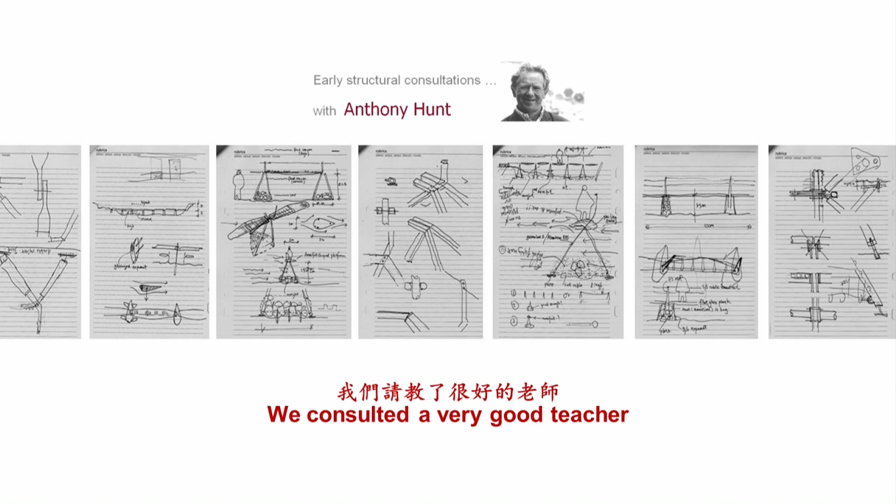So I went back to him and said, no, we don't have that much money. He said, how much do we have? I said, well, $2.50, that's all we have. And that includes your fee. So he said, okay, right. We start the whole thinking process.

This is how the villagers build their bamboo version of it, and every year the water comes and then it will be destroyed. I said, why don't we just use that as a basic principle, knowing how they do it, and then just do it slightly better in such a way that 95% of the time the bridge will be crossable, but only 5% of the time the water will come. The plank will then be dislodged and sink to the water next to it. And after the water is gone, you pick it up and put it back.

In doing so, you don't need a big foundation. You don't need concrete. You just need a bit of stone and some steel wire. And that's how the bridge should be done. So we looked at it, it's a very sustainable and appropriate way to design something that works. And that started the whole process of us using natural material to help the villagers.

But the design of it is quite difficult in terms of engineering calculation. For example, if we were to use a normal way of designing that plank, it would be about 300 mm thick and weigh 1 ton, so nobody would be able to carry it and put it back. So Tony designed it in such a way that it's only 150. It's very clever. So we designed the whole thing so that everybody can work on it manually.

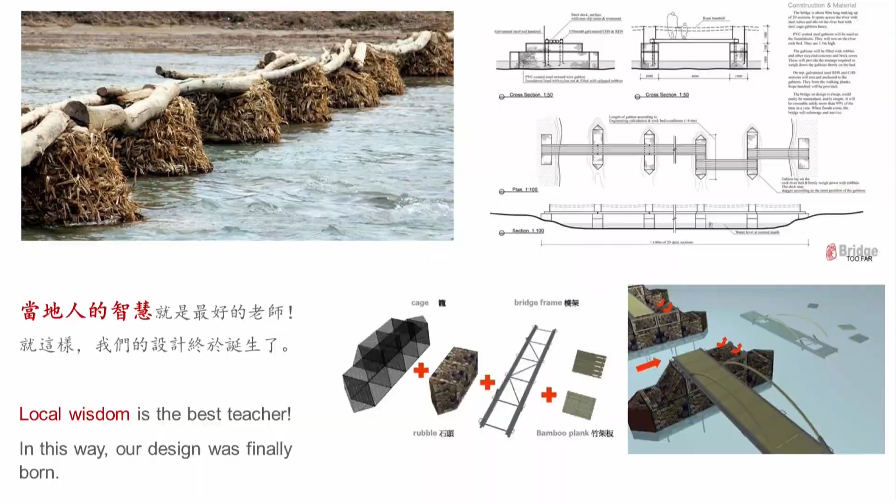Okay, no problem. But he said you have to be responsible for your transport cost. We can donate all the cages to you, and good luck. Then we were worried, and he said, hey, come on, you know Italians, how they behave. He said, hey, come on. All our cages are now made in China, don't worry, we ship it back to Italy.

Okay, so we went back to China and found the factory where the company actually makes the gabions nowadays. They're all made in China now. So we shipped it from his factory near Shanghai instead of from Italy. So that was how Made in China is now well known. Okay, so these are the cages. They are guaranteed to last 50 years, i.e. after I'm gone, the bridge will still be there.

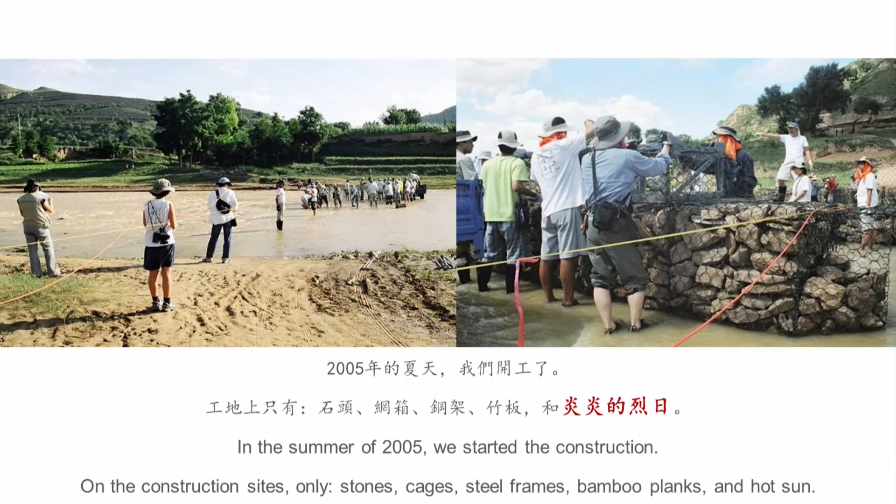And then the students are very nice, and they try to help us moving the rocks, and we try to help ourselves by moving the plank onto the pier. By the way, we did a statistical analysis of how the students help us. We finally realized that the bigger students carry the smaller rocks, and the smaller students pick a big rock. So you see, the size of the rock is inversely proportional to your IQ.

So that was the final plank, and how the whole thing works together. That's the end of the 5 days of work. It took us 5 days to build this particular simple bridge. As you can see, it's very similar to their bridge, but it can be crossed without problem 95% of the time. And this is how we test the bridge: by putting everybody up there and taking a photograph. If they survive, then the bridge is safe.

Luckily, we entered the competition, the RIBA, and we won. That year, Norman did not win anything because his bridge was still wobbling. So he got an award later or something like that. But he asked me to go to his office to give a lecture. And he looked at me like that and said, why can your $2.50 bridge rival my 20 million bridge? And it doesn't wobble.

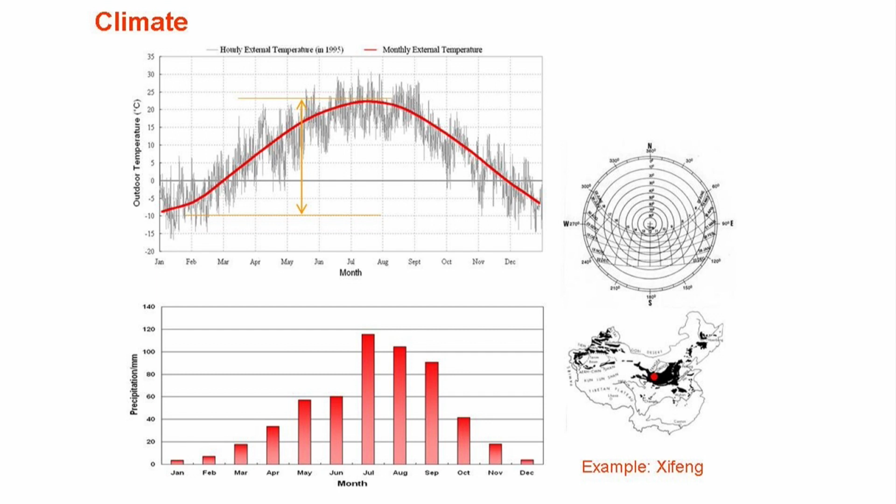Thermal mass, because of the high temperature swing, you only need to use a lot of mass to stabilize the temperature. Once you stabilize, then 40 degrees and 10 degrees become 25 degrees. Your interior will be at 25 degrees, okay? So that is how we should find a way to look at this kind of weather chart and say, yeah, these are a few things that you must do. Of course, there are other things like daylighting and fresh air that you need to incorporate into your design, but that comes a little bit later.

So we then measured some of the buildings that they have, and we found out that actually the traditional buildings, the caves, are more stable, whereas the school that they built using brick is not very stable. So if a school is built like that at the bottom, then you won't be too comfortable in the winter and in the summer. But on the other hand, if you built it with earth, like a cave,

it is better. But on the other hand, the cave can only be very small in terms of volume. Then you don't have daylight and you don't have fresh air. So you have to solve some of the problems by combining the traditional wisdom and the modern scientific know-how. Then you can find a way to design schools better.

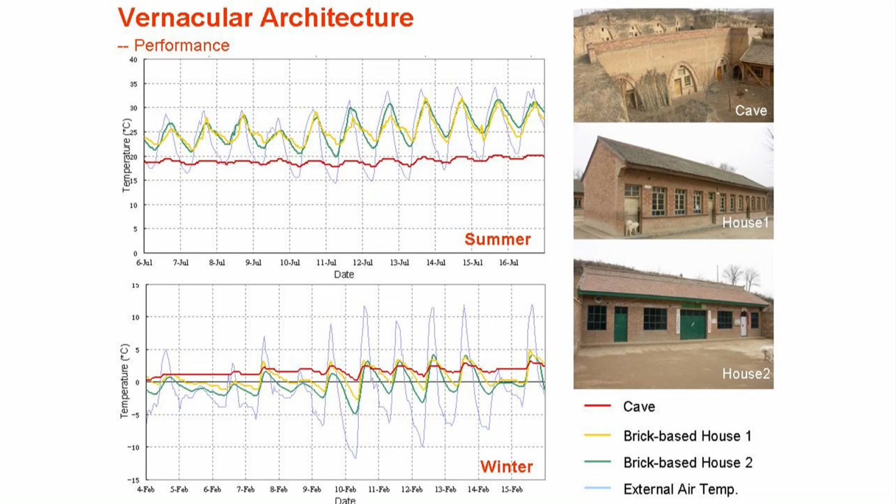Okay, and then the other thing is, as I have learned from my teacher, if you want your building to be cheap, then the locals have to know how to do it. Otherwise, you employ somebody else from outside to build it, and it would be very expensive. So we know exactly how the locals build the buildings using earth and their tools and things like that. So we learn from them.

This is actually part of a PhD thesis of one of my students, trying to see what kind of techniques one might use for this kind of situation, from very simple wall elements to more complicated incorporated systems. So every time you do something, you improve the performance. You just need to do some analysis, calculation and simulation to make sure that you know exactly what you're doing. But there are many different methods. So which one to use depends on how much money you have.

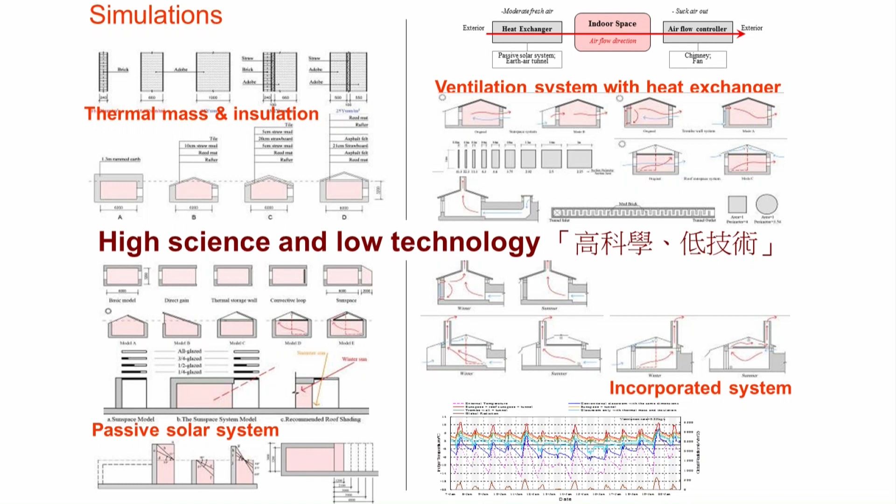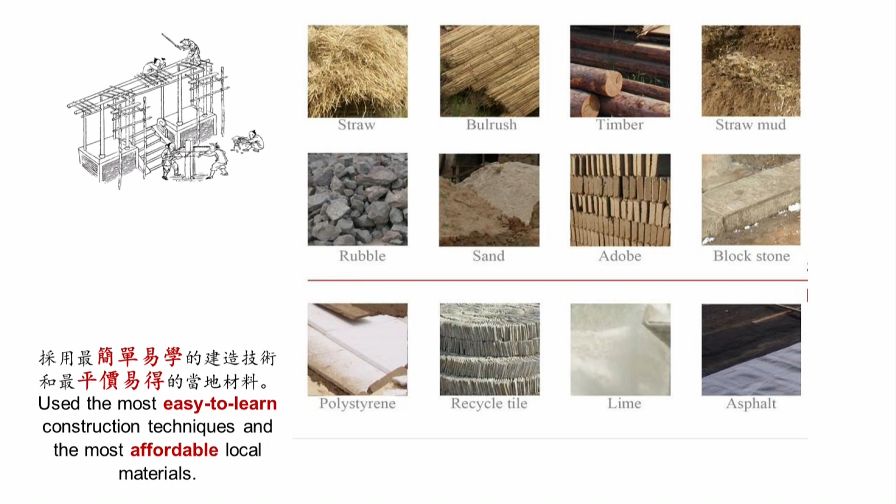Natural material, as I told you, is very cheap because they just gather it from the field and then you just mold it a little bit. But sometimes you have to use modern material to help you, like a bit of polystyrene and things like that. So you have to combine some of the modern material with the traditional material. But the traditional material is about 90% of all the materials. So the embodied energy is very, very low.

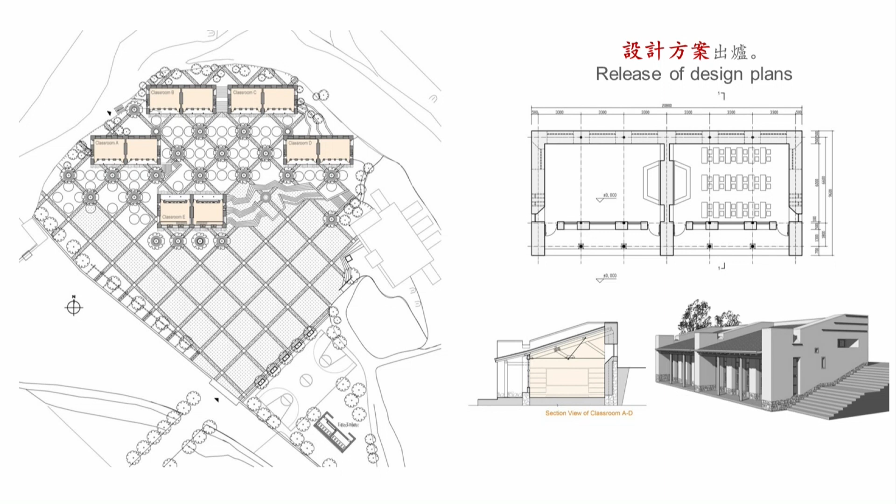This is the kind of design that we make. Very simple, modular, so that we can replicate it. But on the other hand, we have to arrange the modules so that they form different kinds of outdoor spaces for the winter and for the summer, for the children. The level changes according to the topography. So it's a very simple kind of building that we have designed for them.

And then we asked the villagers to build it themselves. Their workmanship level is very low, so your design has to be very rough, very tolerant of low workmanship. But as you can see, it's mostly built with natural materials, low embodied energy, but very effective.

And we did the calculations and we did the measurements to compare with the calculation. We found that actually in the summer, the indoor air temperature is about 23 degrees constant. So it's very comfortable. And then in the winter, when the outside is minus 15, the inside is still about 5 degrees. So you just need another jacket or something.

And the volume is calculated in such a way that every lesson is about 40 minutes. And after every lesson, they all go out. So they open the door, the fresh air comes in, they fill the room. And then they come back in, the children will warm the school for you. Each student is half a kilowatt, you know that, yeah? Okay, so you see, your students are good. Yeah, half a kilowatt.

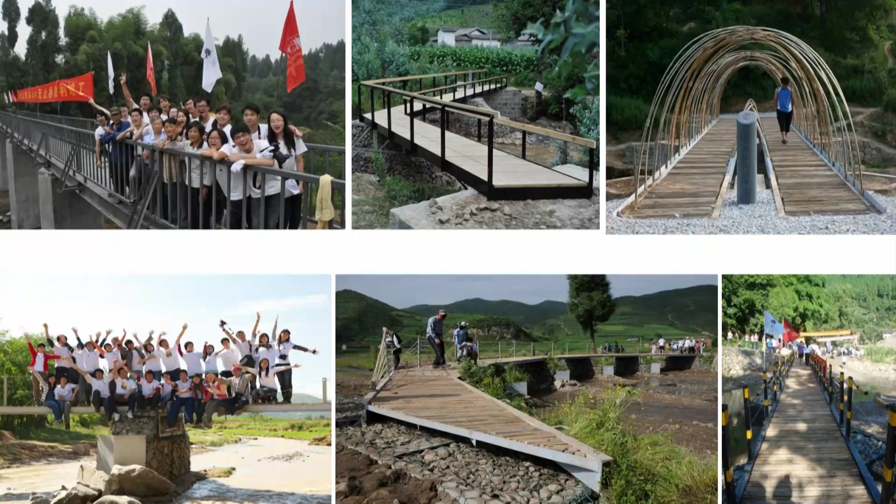These are some of the examples. They're all designed by the students. The only criteria is that they have to be very cheap. So if the student designs something very expensive, they have to ask their mom, not my mom.

And then we have one honorary patron, Sir David, and he told me that actually it's not the bridge that matters, it's the people who build the bridge that will be forever. It's very true, because the bridge comes and goes, but the people's idea will stay if you train the people well. And I told a lot of people that I only need to train 2 students, and if they can train 2 more, then in no time at all, everything will be done. So this is how small efforts can sustain.

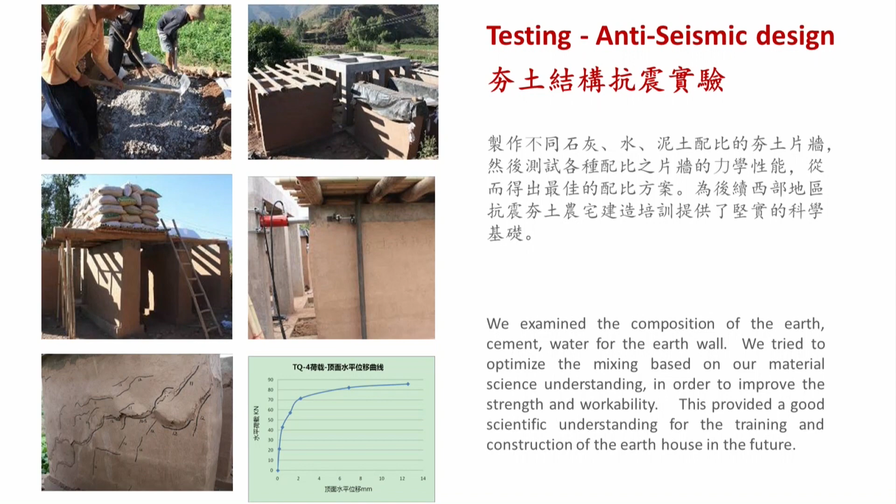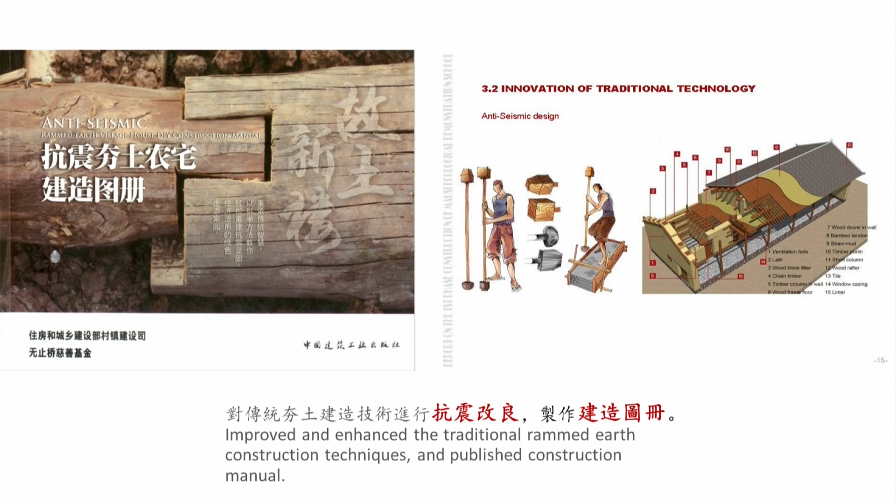And then we also designed the building in such a way that they interlock to each other. So all the elements are locking to each other. The timber, the rocks, and the mud all kind of come together. And then we improve their tools and the way that they work. And then we publish a booklet to teach them how to do it. But that's not the end of it.

Each house is not a standard house. For each family, the students went to do a survey, and if they have more people and they want their toilet to be on one side and things like that, each house is different. So it's their house, it's not the house that we designed for them. So they recognize their house. Some of them want their cows to be underneath, some of them want their pigs to be on the one side.

So when you design for people, we understand that to be sustainable, you have to design for them, the space they want, not the space you want, or not the space that's the easiest. But then, on the other hand, we had to find a way to modularize it. So you can see that they're actually very modular. They just shift around a little bit, get bigger, get smaller. But they're all one kind of structural system, but many different kinds of spatial interpretation.

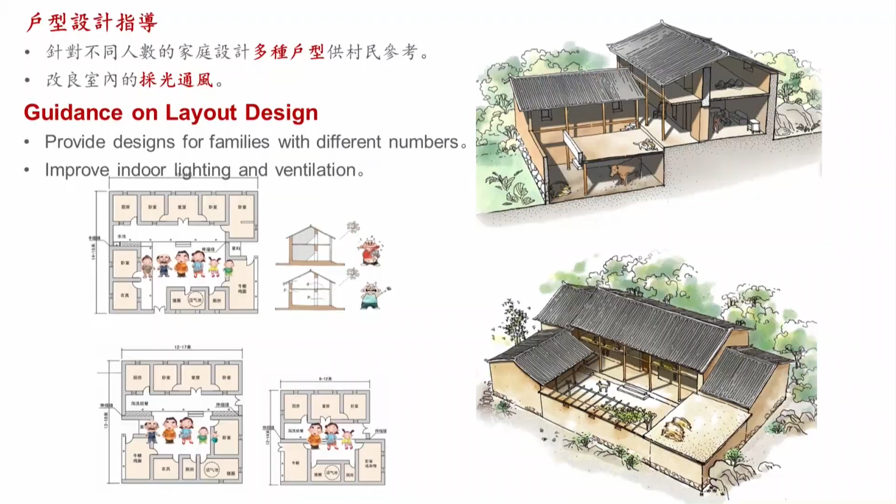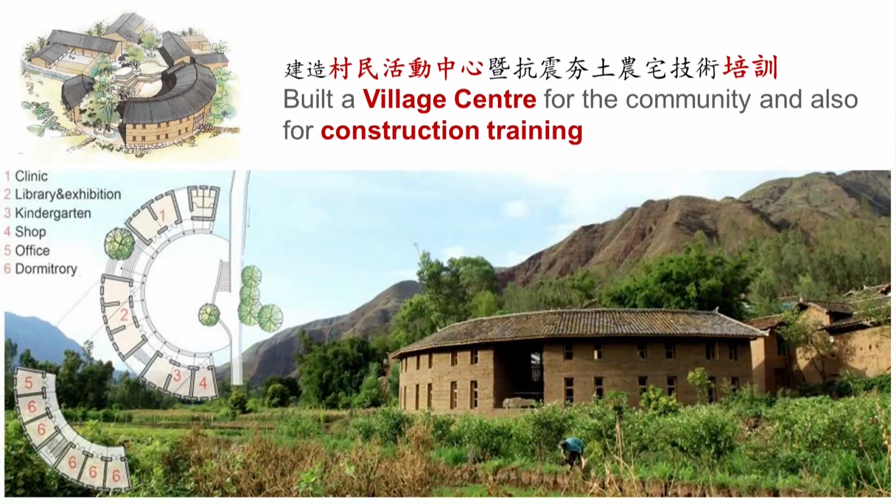So we try to kind of melt into the community by designing and building a little structure for them. And we also went into the village to do a few things, the water supply and eco toilet and things like that. And this became the World Health Organization's first health village in China. Because the World Health Organization has certain things you must do to qualify. So it became an example, so surrounding people can then learn how to do it properly.

We also, of course, do performance evaluation. The outdoor-indoor temperature goes without saying. But the cost is much lower than if you were to employ somebody to build a concrete framed house for you. It's only about 200 instead of 1,000, so 1/5 of the price. And of course, the satisfaction is high because it's their house, not our house.

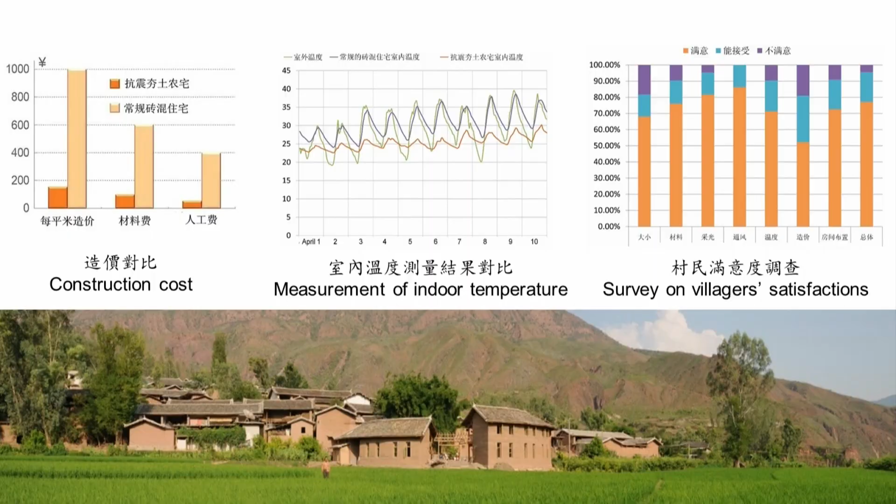And I like this particular photo very much because after the reconstruction, they restart their life, and this is how they plan their next year's crop, in front of their new village, so-called.

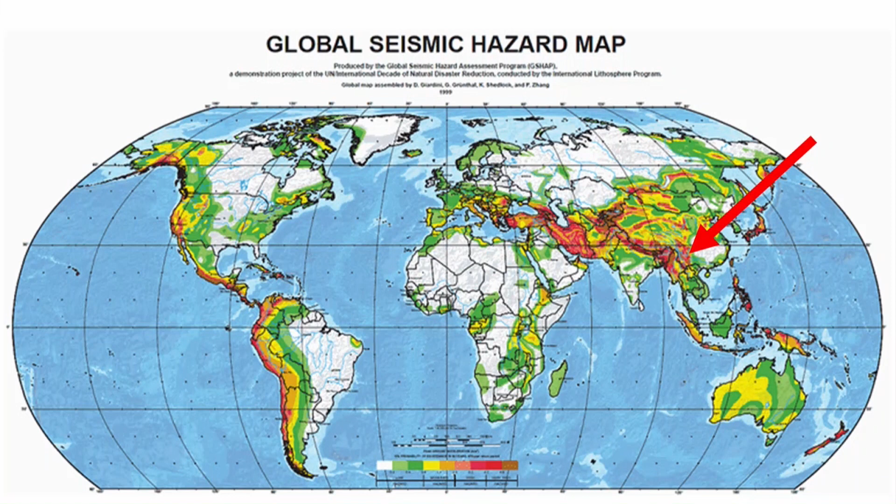But then lots of people ask, once they have money, will they forget about earth houses and go for this kind of Spanish villa and things like that? They may, but then can we do something? So we start our investigation in one of the villages where the arrow is, and you can see this is the seismic hazard map of the world. The red areas are seismic zones, and many millions of people live in those areas. But we work in that spot there.

This was another earthquake that we were called to respond to. And this is the situation after the earthquake.

And this is the old lady again.

I like helping old ladies and old people. So if you get old, don't worry, I will come to help you. But then I will be up there somewhere. I'll help you spiritually, okay?

Thank you. So after the earthquake, what do they want? They don't just want a house. They want a new life. They need a life that is better than what it used to be. They have to stand up again and live life. And that is the more important thing than to build them a house.

A lot of the time we go in, NGO, we build them a house that they don't want. They look horrible. And then they say, you are one of those people, okay, so I give you a small house. No, you don't do that. You have to give them what we call the dignity. They must be very proud of their new life. So that was the motivation behind our architectural intervention.

So we set up a few principles. Okay, we must reuse the material, it must be safe, and we must teach them how to do it properly. And more importantly, we must add to their life somehow. So we team up with a few people, one professor in Cambridge, she's a seismic resistant kind of expert, and then other people to design something that will stand up in the next earthquake. And then we have already learned how to use local material, local workers and techniques.

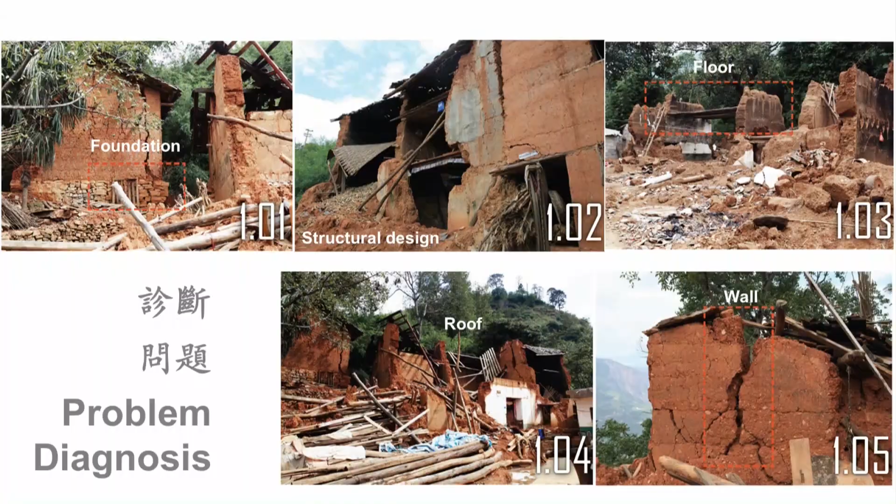This is the lady. I've talked to them. And the first thing you have to do is to see where the problem lies in their earth houses. So we dissect the problem. And then we come back to the laboratory to see how we can improve the material by mixing different kinds of material, different kinds of soil together to perform in such a way that it becomes almost like concrete.

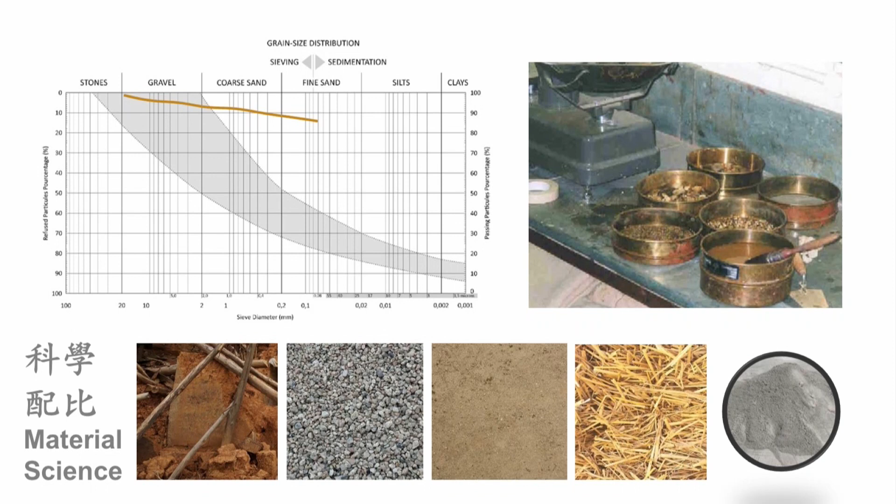So you have to find a way to make sure that that yellow line is within the gray bar. Then you should be okay. Otherwise you have to remix the soil, you have to add something to it, you have to take away something to make sure that it behaves. So this can be done scientifically using the material science understanding. That's easy, but you have to do it.

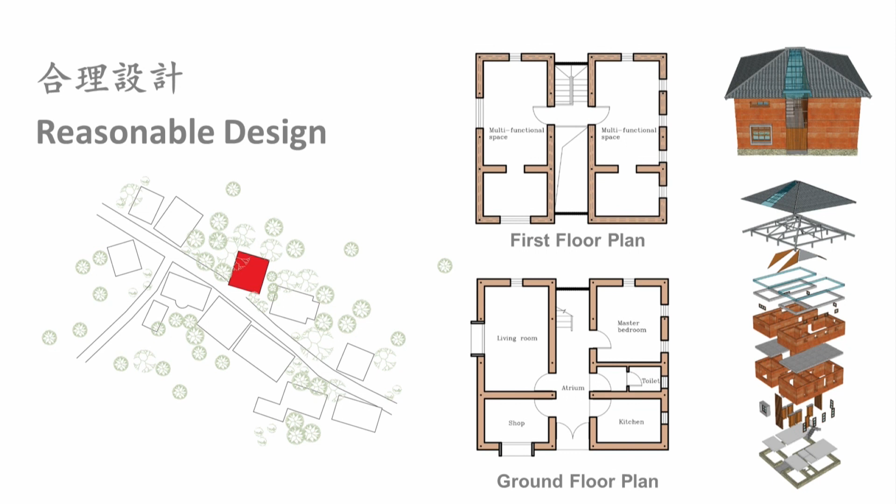If you do this in your studio, you probably get a C- or D+. You know, students, when they do design, the first thing is, oh, nice, looks nice. You get a B+. This is C-. Never mind about the C-, okay? Let's start with C- and see how it goes.

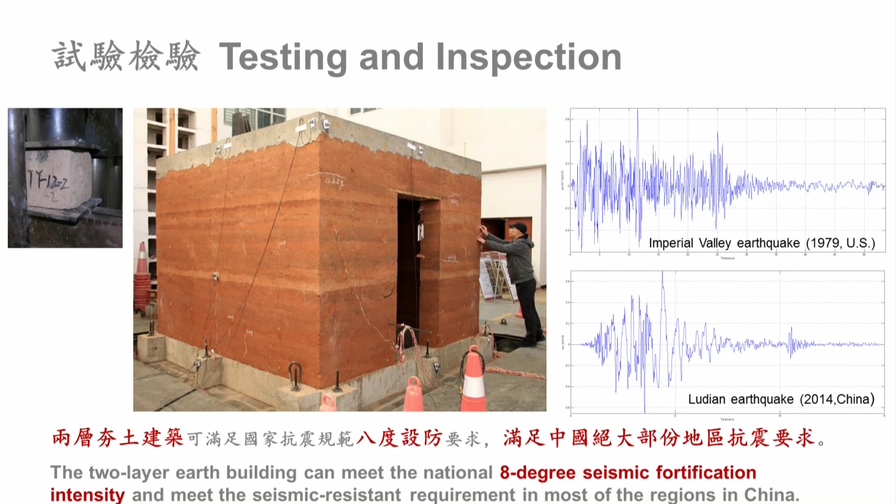And then we test it so that what we are trying to do is safe. So the 2 diagrams are different kinds of seismic wave patterns. So we have to test different patterns of earthquake to make sure that when earthquakes come in different ways, they will survive. And we test a number of them, and it survives. And it also satisfies the China 8th degree requirement. So this satisfies the national standard. First time that an earth building can satisfy the national standard. Before that, it could not happen.

And then, of course, we also do the cost performance analysis that you have seen by using our understanding of the psychrometric chart. You all know the psychrometric chart, yeah? Good, thank you. This is again the cold weather, you can see, and dry.

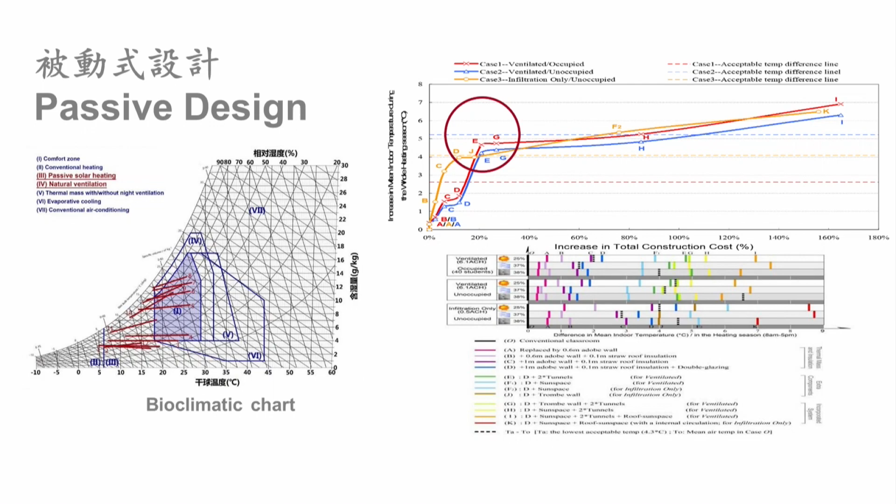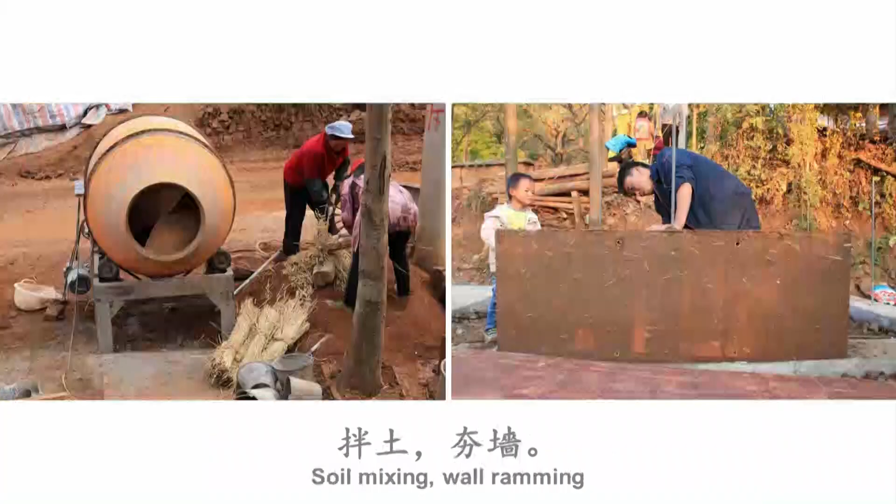Okay, we have to teach the workers how to mix the material, how to pound the wall, because how you pound the wall matters a lot. You have to compress it to a certain extent that it becomes almost like concrete. And everybody has to know how to do it. We add some straw.

And we improve their formwork, because if you have to pound it very hard, then the traditional timber formwork doesn't work anymore. So we have to use steel formwork. So we introduce a modular formwork for them to work on. So the quality is much higher, therefore.

And we taught them how to do it, and this is the owner of that particular house. It's the son of that lady. And now he's our contractor, so he's now making a living by building these kind of houses for others. So we're introducing skills to them.

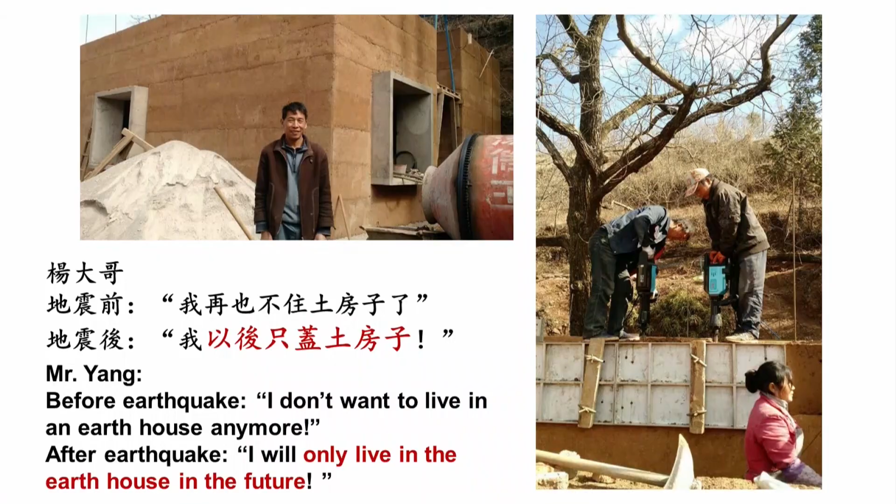And as you can see, we introduce also new tools, now an electric pounder, so the soil can be pounded very, very compactly. And this is how it works. And this is the end product, the square house, as you can see. Very simple. This is the old man. And

this is the in-between space that the old lady now enjoys. Because we talked to the old lady, she does needlework, and she has been doing needlework her whole life. So okay, if you want the old lady to do needlework, what kind of environment do you need? You need somewhere that is cool enough or warm enough, and also bright enough. Okay, so this is how the space works.

And in this space the temperature is so constant that she has air conditioning all year round. In the winter it's warm, in the summer it's cool. And because the two sides are perforated, the wind can blow through, a little bit of air movement, very bright. And some of the leaves fall onto the roof, the skylight kind of. When the sun shines onto it, it kind of dances a little bit.

Nowadays, she not only uses this space for needlework, because so many villagers like this space when the outside temperature is so high. So she charges people to come to her home to drink tea now, which is very good. Okay, so she's very proud. And now she has a house that can earn money.

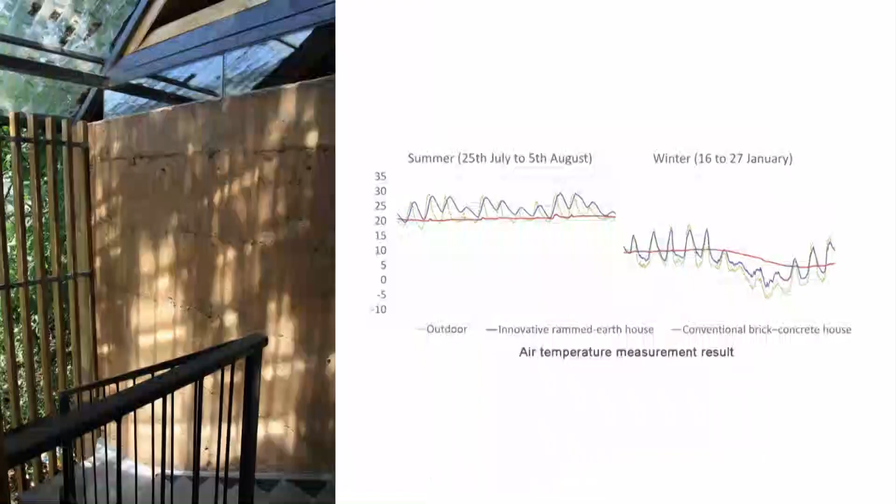And we did the measurement. I mean, you all do measurement after your design, I hope, and it works very well. The cost is only half of the normal cost using concrete and brick and other things. So it's very cheap. The performance is good. It's very strong, and everything.

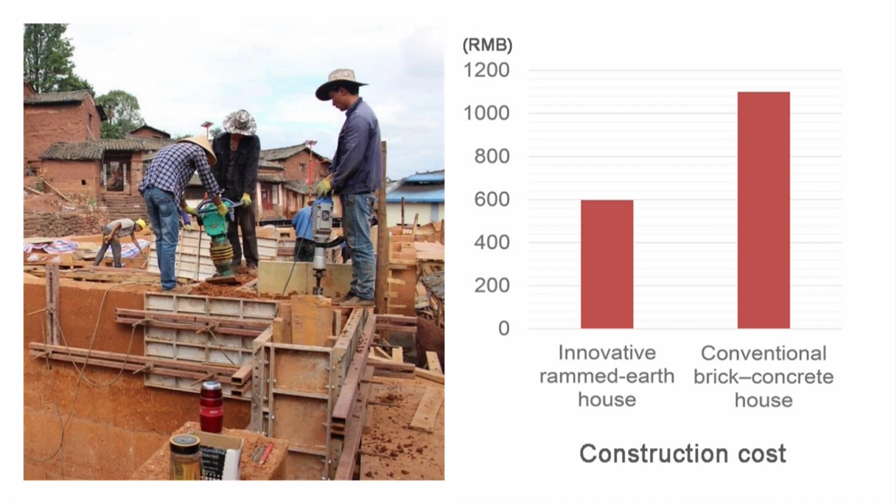And also it was featured in AR, and we got the World Building of the Year Award 2017. So it's not a C- project, I can tell you. One of the judges was Ian Ritchie. That's why.

And then nowadays we're also drawing up the new code of practice for the local government, so that they can regulate some of this work and make sure that things are more properly done in the future. As I told you, we don't just build them a house. We give the old lady her life back, with dignity. She's now the proudest person in the whole village, because so many people go and see her house, and she charges people.

And from then on, we also started to do many things for the locals, based on our one university, one village, i.e. using the university know-how combined with the village people's wisdom, we try to find a way to do villages better. And there are a number of principles, so I don't want to bother you unless you want to do a PhD with me. These are all my PhD students' kind of structure. Basically, it's just to fill up the pages so that the PhD becomes bigger.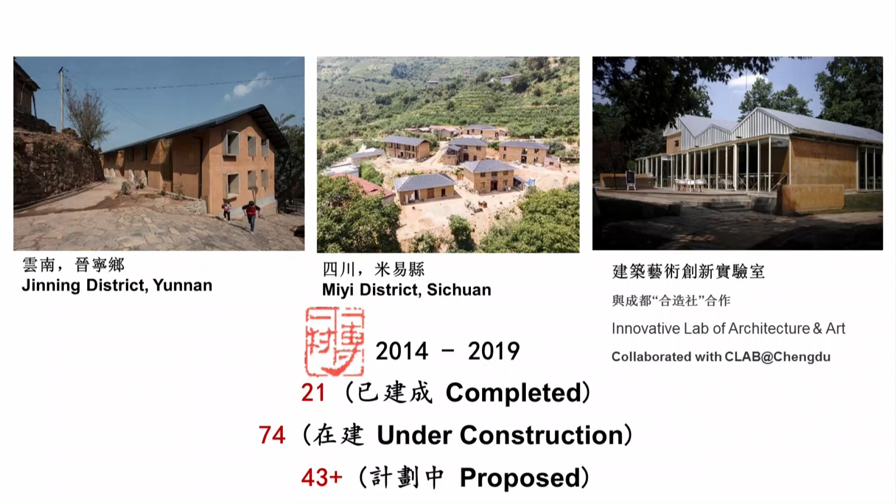At the moment, we are doing about 150 on site. We have 4 construction teams, all formerly only villagers. So they now help to design buildings, construct buildings, and also make a living. And this is our latest research center in Kunming, the main structure built entirely of rammed earth.

One thing I want to show you is in this building we conduct further research on materials and construction. We train people and we also host events. So when you have nothing to do, you can come to China and we can teach you how to build this kind of wall and get your hands dirty and have fun and go to the old lady's house and have tea or whatever. This group, the red helmet crew, is very fun.

You know, in China there's a problem that in villages a lot of the men go out to work. The villages are left with the old people, the women, the children. We call it a village that is almost empty in terms of life. The red helmet group is China's first all-woman construction team. Okay, so we organize them so that they work to build their neighbors' homes.

And we taught them how to do it, and we had to resize the formwork and the tools so that they can handle everything. And after a few projects, we found out that they are more reliable, work harder, don't drink, don't sleep. They're very healthy and very good and understand exactly what you want them to do. The men always say, oh yeah.

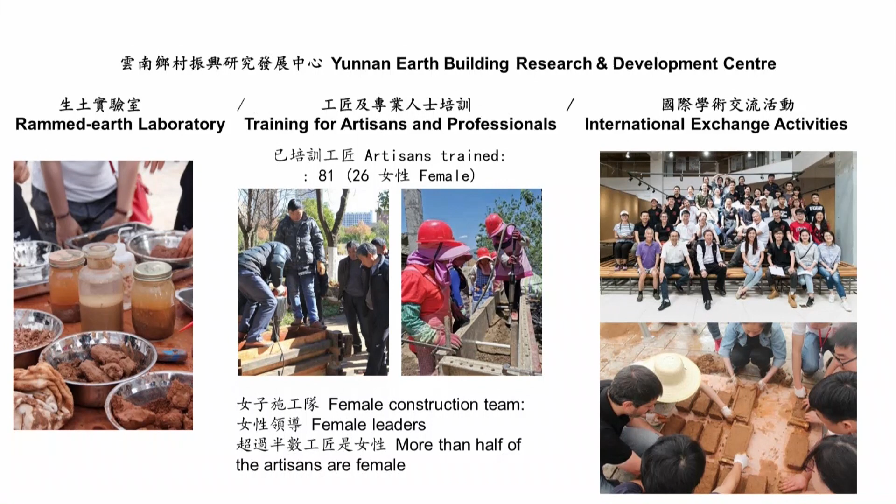This was the first house that the women teams finished. The quality was much higher than what the men could do, and we now use it as an example. We show the men team how it should be done, but they never want to know.

Okay, we come back to the 8 words that I started my lecture with. Actually, these 8 words were by somebody who has a lot of wisdom, not me. So they say, you must do 8 things when you start your architecture or whatever career. And I showed these 8 words to my vice chancellor, and he's a very good calligrapher. So he wrote the words for me, but it was from somebody else.

Okay, how many of you learn how to read Chinese? Okay, all of you, thank you. Right, so you know exactly where it goes, so I don't need to explain anymore. Chinese actually reads that way, yeah? From the bottom to the top? No, from the top to the bottom, okay. So, can I have the... it's almost done. Now I need this because my finger is not allowing.

So it starts there, and it goes there, and there, and then it comes down there. So there are 8 words, meaning 8 things that you must do. Okay, I'll show you how. In architecture, in any project, you also need to do things in your life to make sure that it becomes meaningful. Okay, the first is, of course, we start with earth.

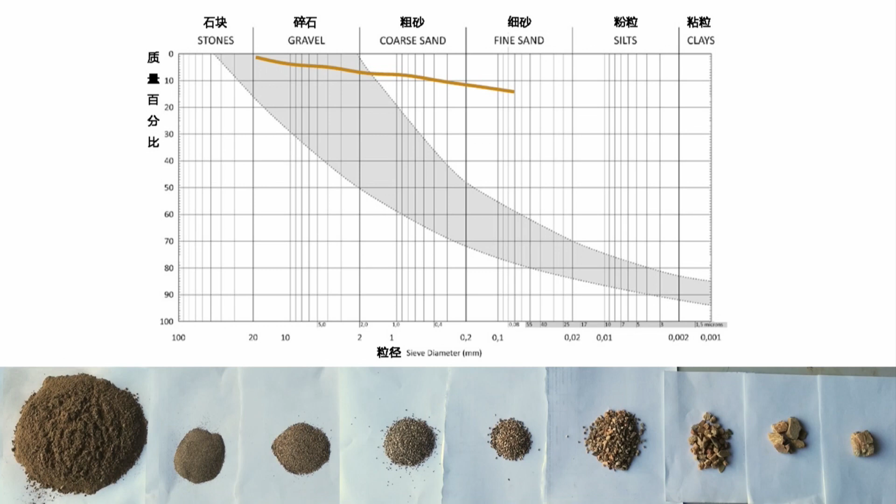So if you can solve that problem, you solve the problem for half of the earth population, i.e. 4 billion people. So it's not a small thing that you are doing. So don't underestimate the potential, the significance of something very simple. And of course, you have to apply your knowledge. You learn enough to know exactly what to do, how to mix different kinds of things to achieve a certain kind of performance. And you have to feel the material, you squeeze it, you taste it.

May I add something? I'm from Wageningen University, which is an agricultural university, and we have a professor doing soil science with the students, and when they go out in the field, he has the students taste all the soils. So Edward is really not kidding. No, I'm not kidding.

You taste it, you say, calcium, potassium, whatever. You really have to taste it, otherwise you don't know what you're doing. You squeeze it, you taste it, you massage it, you play with it, and then you have to know how to work with it. What other things you must add to complement it. All these other things are very simple things, but most of these things the villagers know how to do. So you have to be humble and learn from them.

I think to be an architect working in the field, the first thing you must do is to be very, very humble. I'm quite sure next time you go to site, you will know that. They can lay bricks faster than you. Things like that. Okay, never mind.

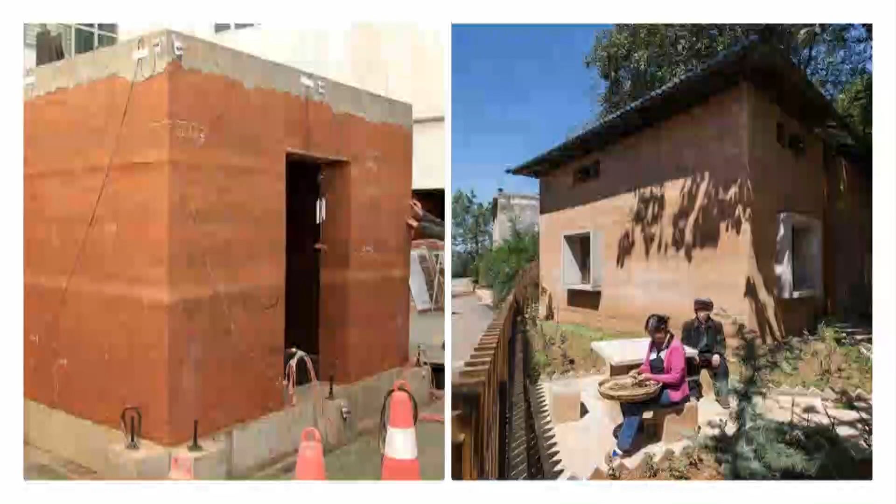And then you have to, of course, apply your scientific understanding to test it, and then try to build something that is, I would say, simple but poetic. When I designed this building, I told my students that the only thing I want to express is earth. So if they see this building, they see earth, and that's all they see. They see nothing else. They don't see geometry. They don't see gymnastics. They see earth.

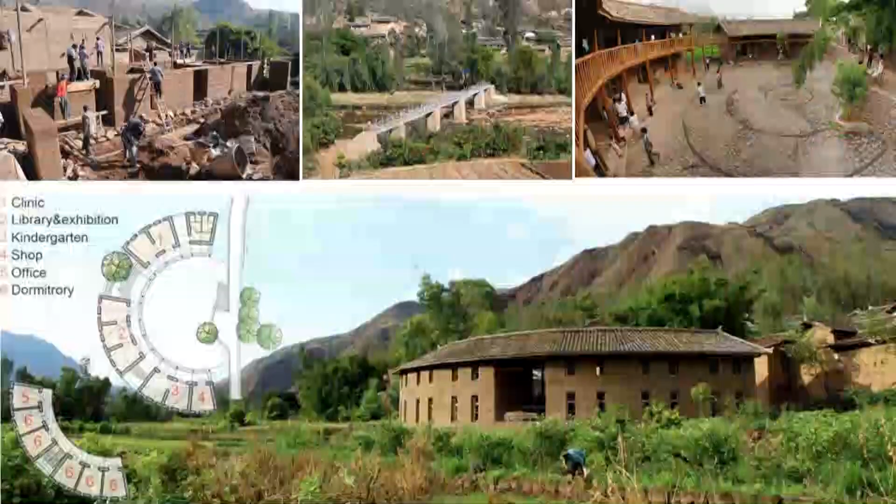So this is another building, and you can see that all my buildings are fundamentally what the material wants to say. Then we try to find a way to design our building to achieve a kind of poetic feel. My teacher was Dean Hawkes from Cambridge. He always told me, Edward, since you are with me, I may as well teach you something more useful than you normally are taught elsewhere. When he says elsewhere, it means elsewhere.

He said to do something environmentally friendly and achieve a certain performance is easy. But at the same time, if you can make sure that it becomes poetic, it's far more difficult. I could not understand what he was talking about for many, many years until I started to build something. The poetics of the earth has its own language. You should not just compose sentences.

You have to compose poems with your architectural skill, and this becomes something that I think is most important to do. And I can tell you that our engineers very often cannot do that, because they don't know that this is important. But as an architect, I strongly advise you: don't build buildings, just compose poems. Forget it. Never mind.

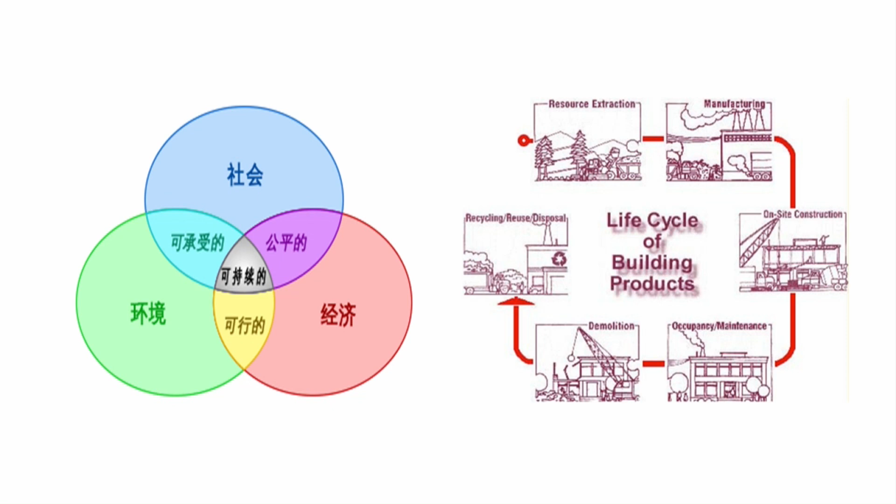And that doesn't mean that it's only poetic. It means it has substance. It has a theory. It has a reason. It has a vision. It has something behind it that is far richer than the material itself. So we incorporate into it life cycle understanding, sustainability understanding, human understanding, and the kind of habitat and people's use understanding. At the end of the day, if she is happy, then your architecture has a lot of meaning. Otherwise, it has very little meaning, even though it is very strong.

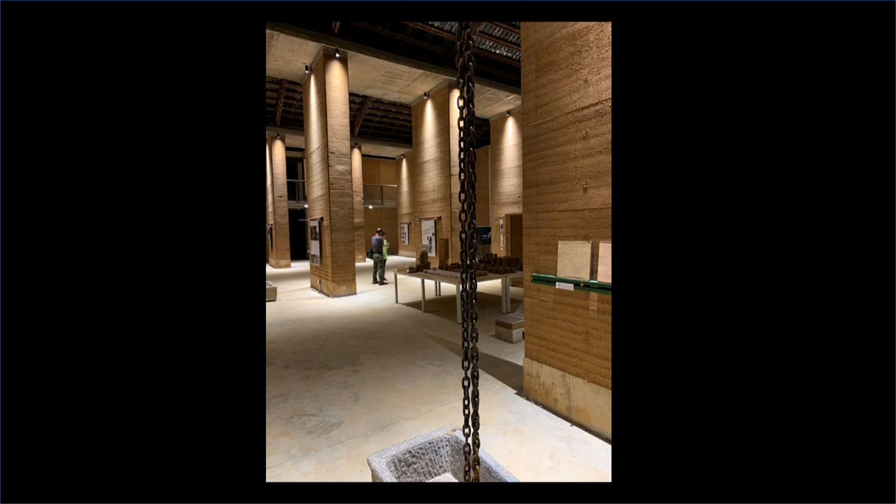Next time you come to Kunming, see our research center. This is how one part of the research center looks inside. As I told you, in my buildings I use earth. So the building is earth. You only see earth. And this is the highest quality earth work that we can now do in the world. A lot of people come and see what kind of quality earth can get. And we use this to teach the villagers that earth building can be extremely beautiful.

So when they come to this building and see this and some other things that we did, they go back and say, yeah, this is something I want. This is not poor. This doesn't mean that I cannot afford it. This means that I'm more than able to afford it. Therefore, I want to do something better. Oops. Forget about that one.

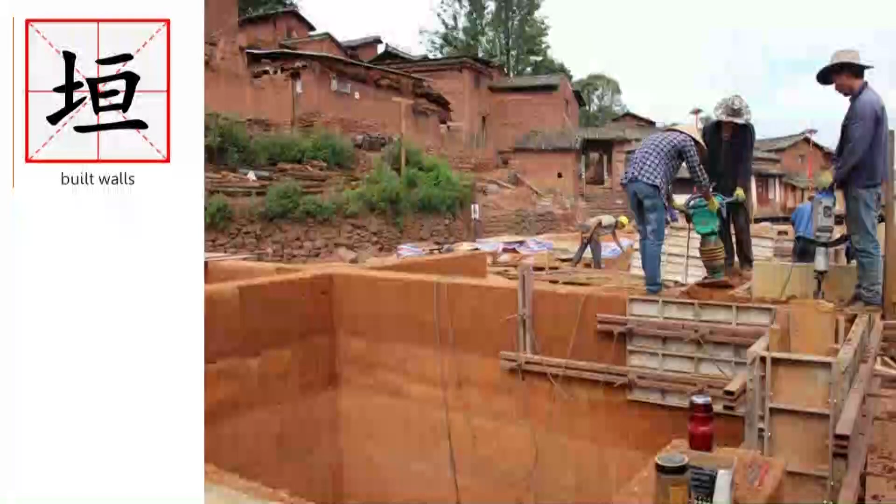Now with the very beautiful things, we start to teach people how to make walls, how to make buildings. This is not by us. I think this is by Herzog. After he saw us doing some earth building, he's trying to do earth building. But his earth building is very expensive. This is ours.

Then, after we started to improve people's lives by making walls and homes, we have to write codes, we have to standardize it, we have to make sure that everybody knows how to do it properly. So we're now teaming up with some engineers to write a national standard on earth building in China. It takes a long time, but you have to do that. Otherwise, nobody will copy you. You have to standardize it. This is one of our earlier construction practices, how to do it, but this is not official. So we have to officialize it so it becomes a national standard.

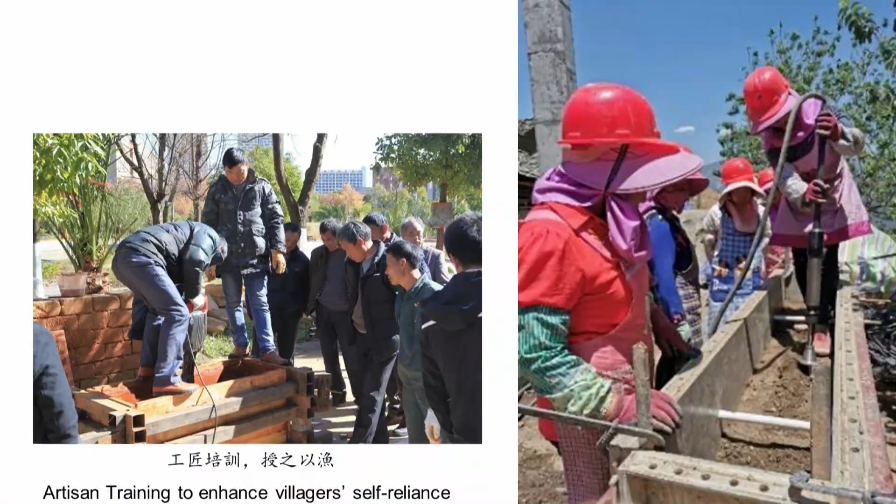And we team up with a lot of universities to do a few things. At the moment, we are working with Habitat for Humanity. They have a number of sites in China that utilize our methodology and workmanship to build houses. They are much bigger than us, so they can build more. They build 100 at a time. But we have to teach them how to do it. As I told you, this is our research center.

And then we have to find a way that our architecture and life are in harmony. Your architecture has no meaning until people use it. I cannot emphasize that enough. Your architecture has no meaning whatsoever until people use it. So a lot of the time when you see a photograph of architecture without people, you don't know what meaning it tried to give you. Our photographs always have people, otherwise it's so empty. Doesn't look good.

And then we are now doing the entire village, not only the house itself, but also the space around the house, how the whole thing is organized. So this is one of the few villages now that we are doing en bloc. So this is the design. It's a more organic layout, and outdoor spaces are now important for us.

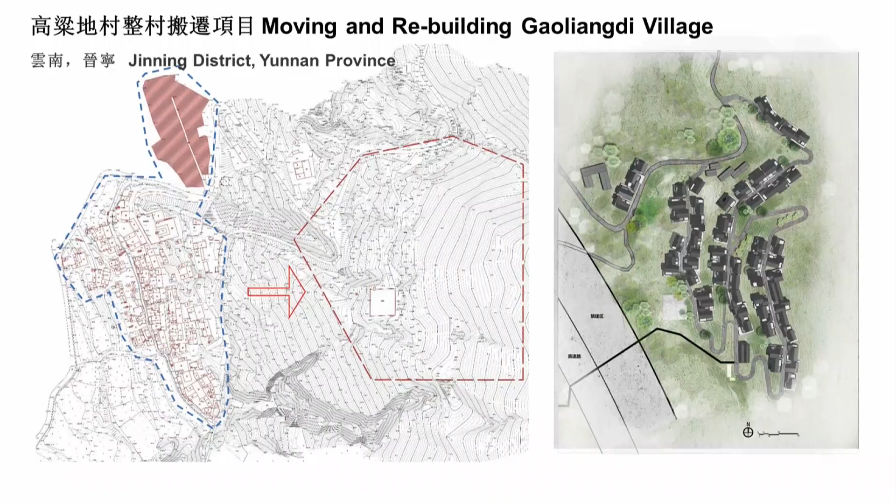And we also try to incorporate the United Nations sustainable development goals, so 17 of them. And under each one of them, we have to tell the United Nations our way of achieving it. So this village that we're going to design will be the first village fully subscribing to the UN 17 SDG goals. And then maybe next year we'll present it at UN Habitat or whatever they call it.

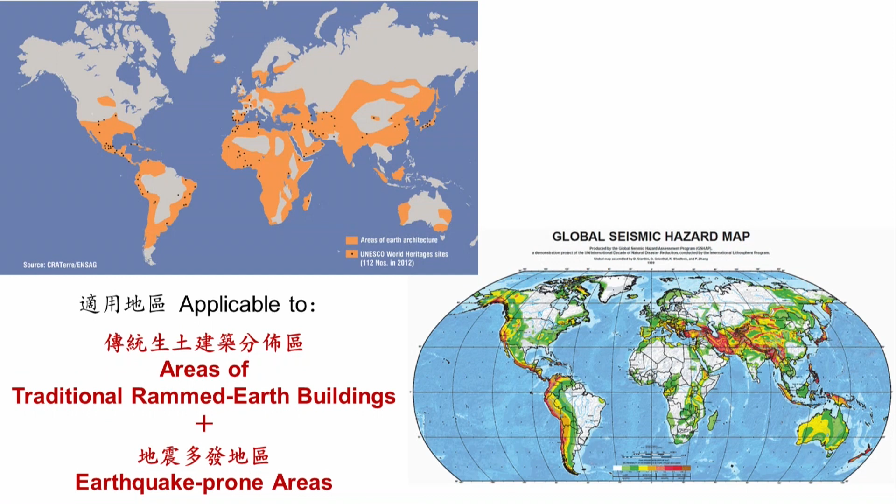Oops. Okay, and then the next word is that you have to not only work in China, but work everywhere else on Earth. So we are trying now to do a few things in Nepal, in Cambodia, and surrounding areas. So we are now spreading out to the other side of the boundary. So you have to find a way to make sure that this becomes international. Okay, so you talk to people. So we are now working there. One day we need to work everywhere. But you, of course, cannot do it yourself. So you have to find a way to combine it with your academic pursuit and your team and things like that.

Yeah. Shigeru Ban. He also worked on this kind of natural material. But I always find his buildings a little bit too articulated. But anyway, that's his way of doing things. So you have to combine different people's expertise and form a group. So every 2 to 3 years, we meet up and share with each other what we have achieved. And so the whole message is more widespread.

Now, last but not least, the most important thing that someone taught me is that you will die soon. If you will die soon, what would you do? My son once asked me, Dad, when are you going to die? And then he kept on saying, what are you going to leave me? That's the son that I'm going to have dinner with tonight. Anyway, then I said, son, I'm going to leave you a better world to live in. Is that all? Okay, fine.

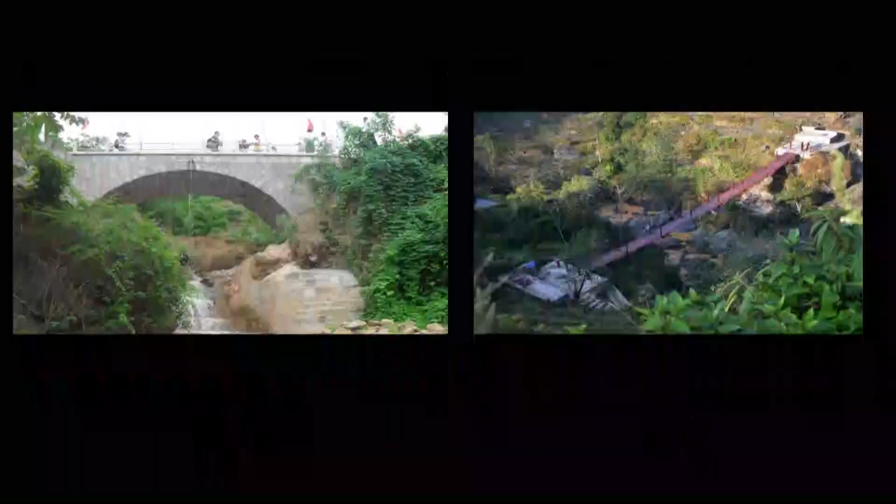This is actually not exactly mine. These are from my students who gave a lecture, and I use his. So we use bamboo to build bridges in that area. We learned from that. Of course, yeah. You did mention that. Yeah, I'm not going to talk, so you just see how the process looks. You cannot talk about bamboo without talking about panda, you know. Of course.

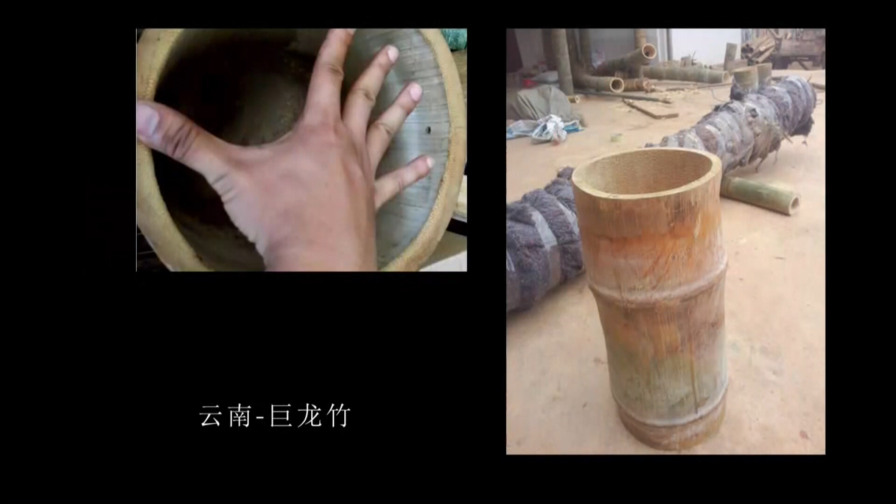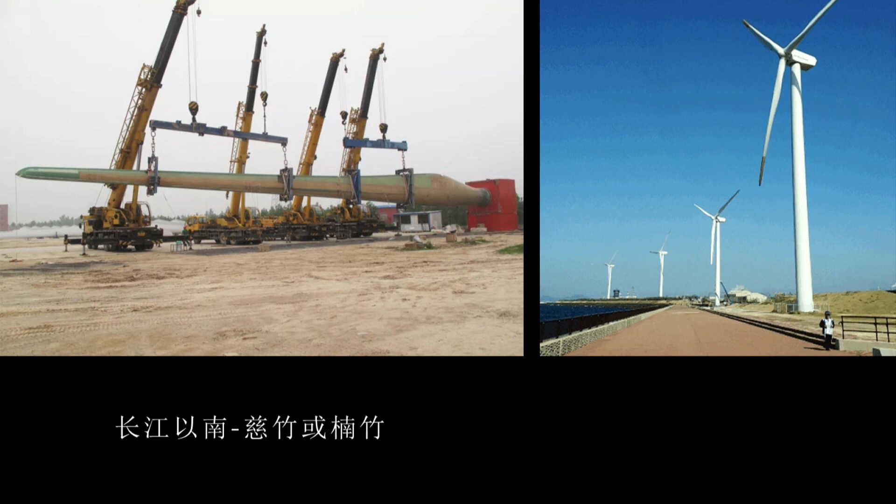Yeah. Now they're using bamboo to do this, you know. No, that would be helpful.

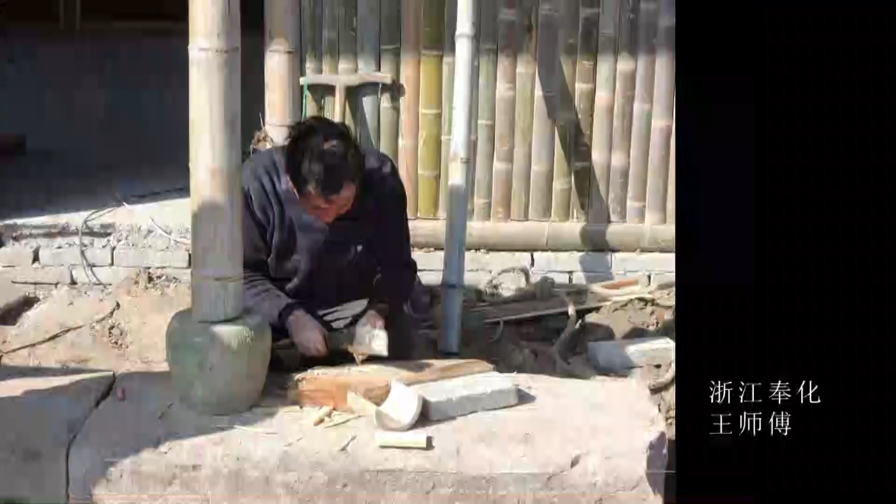And we have been using bamboo for thousands of years. And in China, this is the first group of people who investigated bamboo, about 60, 70 years ago, because at that time there was no material, only bamboo. And then the best bamboo craftsman is this man here. He built this bridge using these tools. How about that?

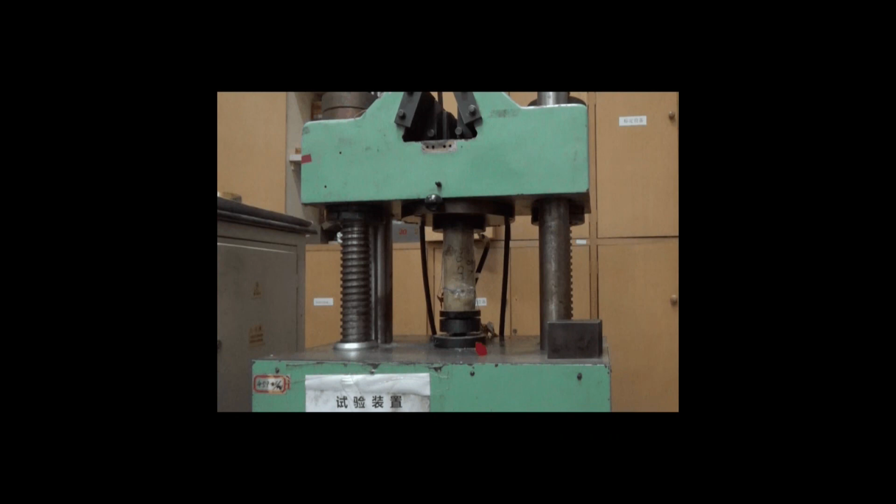So these are more modern interpretations, okay? So we did something here. This is the situation. Then what type of bamboo? How to test it? Again, you have to apply your scientific understanding. This is the design. This is construction.

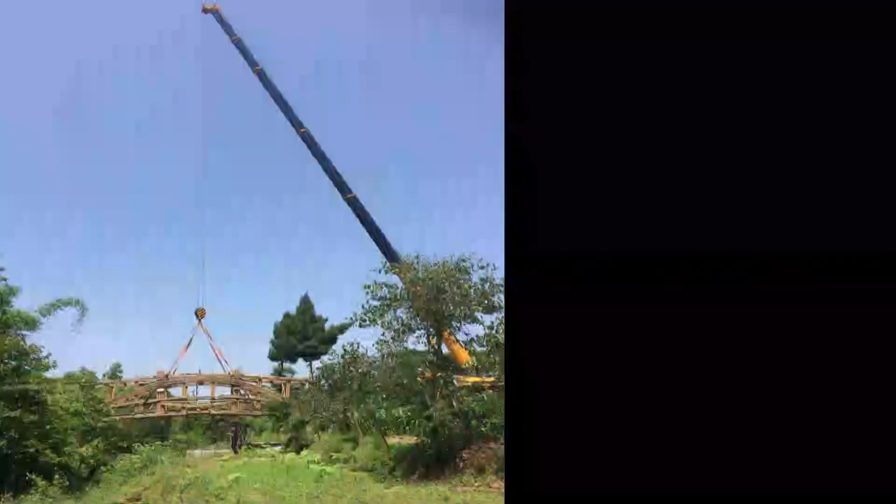The first bridge. This is the full bamboo bridge. This is how we celebrate. This is the first 17-meter bamboo bridge, fully bamboo. It's I think the first in China, the longest. This is how we celebrate.

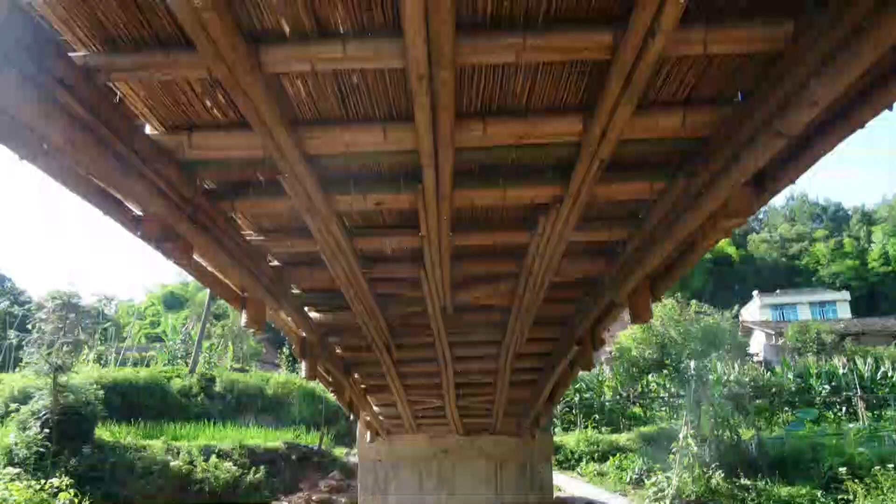This is a very good story, I can tell you. After we built the bamboo bridge, we wondered where the maintenance cost should come from. And they invented this. They put it there. Now it's a bamboo temple. And they donate money. We now have money for maintenance for the next 200 years.

And they made it into a community center. Funny how people look at some simple architecture. So it's not a bridge, it's an open building now. Yeah. It's a bamboo temple now.

This is another bridge, and then we did more tests on durability. We now can find a way to build bridges that last 30 years. And jointing is the most difficult thing to get right. A lot of people told me that bamboo is very strong in tension, very weak in compression. Wrong. Bamboo, when you try to join them together, is very strong in compression, extremely weak in tension.

So every joint that we make is compression, because jointing is the most difficult part of bamboo structure. We investigated about 20 ways to join things by compression. So you see, this is all by compression, not by tension. Because if you tear the bamboo, it's extremely weak. One piece of bamboo is okay, but if you try to join two together, it's always compression. I have to teach you this because it took us 5 years to find out.

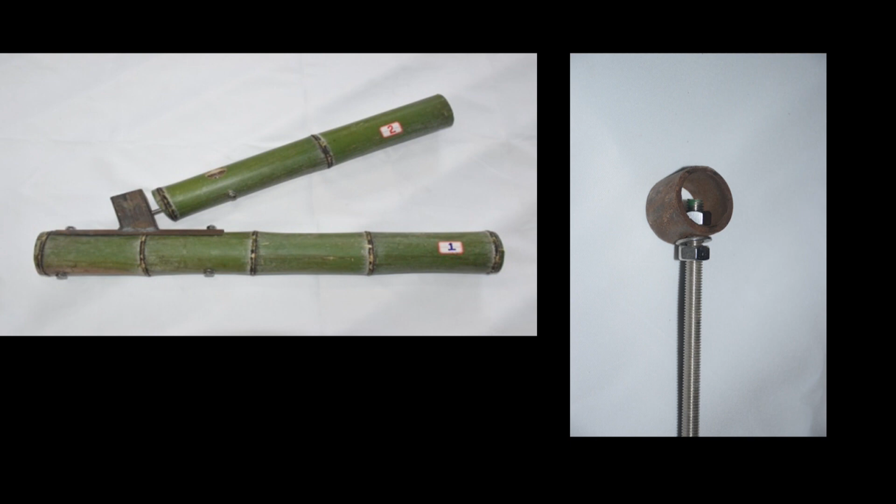And different ways to join them, and we have to use a lot more tools than the old man. This is our second. This is a 22-meter span bamboo bridge, fully bamboo. Now it has become the cinema.

And at night, you know what happened? Because the floor is bamboo, it's perforated, it's very cool, so they sleep. So they always try to make sure that the width is more than 2 meters, so that they can sleep like this. So about 20 people sleep there in the evening.

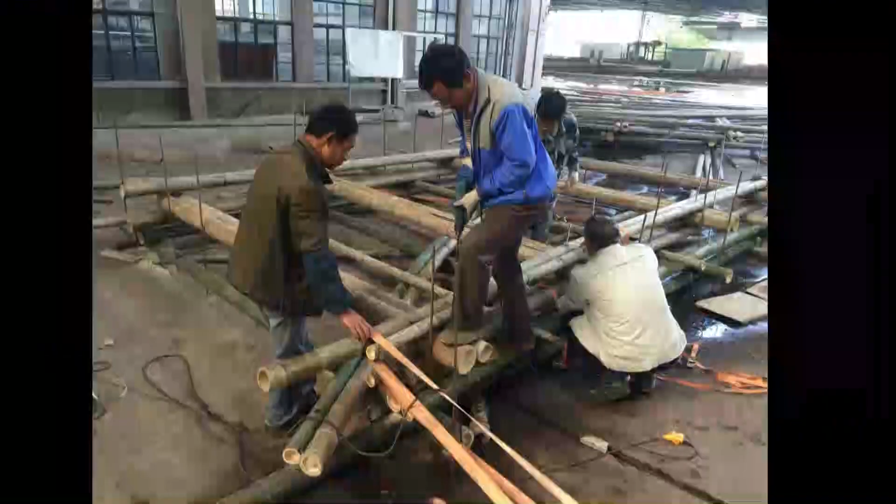We're now building a much bigger span. Have you seen this one? This is the largest bamboo span in the world, 35 meters. That's also by us in Beijing. So this is one span. So if you can do a span like this totally using bamboo, then we can do a lot of things.

Inside is like that. Forget about the decoration. We just look at how it comes together. It's all compression joints. So this is the longest spanned bamboo roof in the world now. And we're now writing China's national standard on bamboo structure. As I say, once you find out new things, you have to codify it. Otherwise, nobody will copy you.

The more important, difficult thing is how it comes to the end. Because bamboo doesn't like a few things. One of them is water. If moisture comes to the bamboo, it will rot away in 3 months.

We're now building anti-seismic school buildings using bamboo. Okay, never mind about this man. We are also now experimenting with using bamboo for houses, but we are still experimenting. In some parts of the world, earth houses are no good because you don't need the earth performance, especially in hot areas. Earth is useless. So if you work in the Philippines, for example, then bamboo or something light.